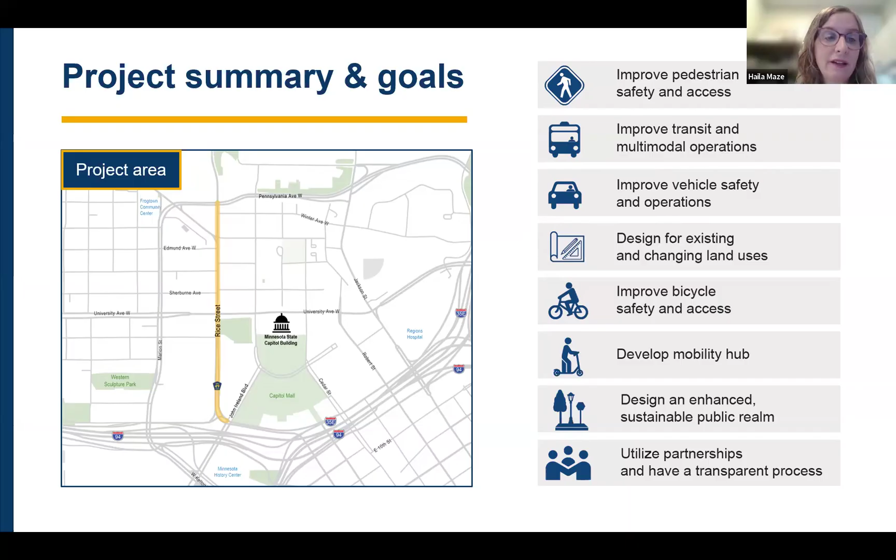This is a project timeline that walks through the steps of where we stand, from when this project was first initiated last year through when you'll actually see construction out there.

Last fall and winter, some of you may have been involved in our engagement, because we talked to the community about what's important, the priorities, and the goals you saw on the prior slide were informed by that. We're here now in spring 2025 to talk about potential designs, some options for what this corridor can look like.

You'll see us again later this fall, when we'll be narrowing things down further to get a more recommended design and start thinking in more detail about how this will look and feel and how people will use the space.

By late 2026, we'll have worked through the design to the extent that by spring 2027, we anticipate starting construction. I believe the intent is to start and complete construction within one season, not multiple seasons, but there's certainly other construction in the area we can talk about as well.

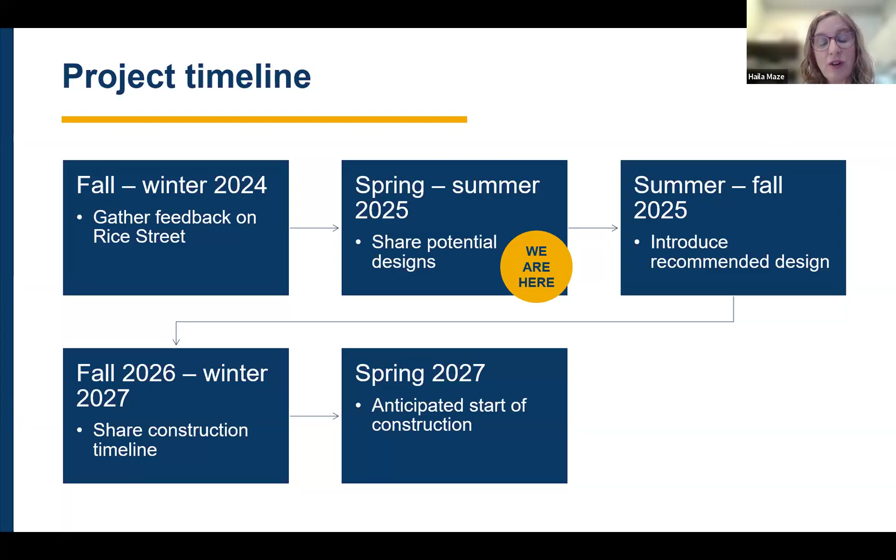We are coordinating with a number of other projects around this area, looking at the different opportunities to make sure that when all these things are happening, they're adding up and providing something more than the sum of its parts. We want it to feel well coordinated from the public's perspective, with things working in the same direction rather than flying in from different angles.

I won't claim that we're experts on all these projects, but we are talking to the people involved in them pretty regularly. I'll talk very briefly about what each of these means. We can answer general questions, but we're not the subject matter experts—there are other project people involved.

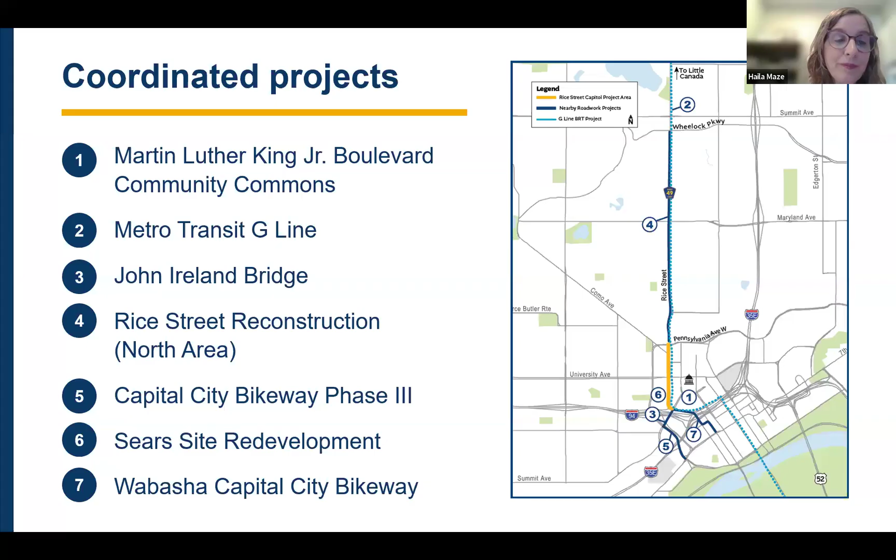We literally talked to the Sears site staff earlier today, and we will be talking to them regularly. There certainly is a lot of questions about the timeline of that, but we want to make sure it's aligned with the project goals and that we have a good understanding of how they work well together. And the Wabasha Capital City Bikeway, part of the bikeway network being built out downtown, will be connected with this as well.

Mentioned earlier the construction timeline. You can see we will be impacting your corridor for the next few years, starting this year all the way through 2027, with this segment being 2027. This staging is being done very intentionally. The goal—we cannot speak to the specifics of that today, it's too early, except for the portion already under construction. But we will be mindful that this is a significant impact to the community, and the detour routes and planning around that will be done thoughtfully. It's another reason to sign up for updates, so that updates continue past construction and design phases.

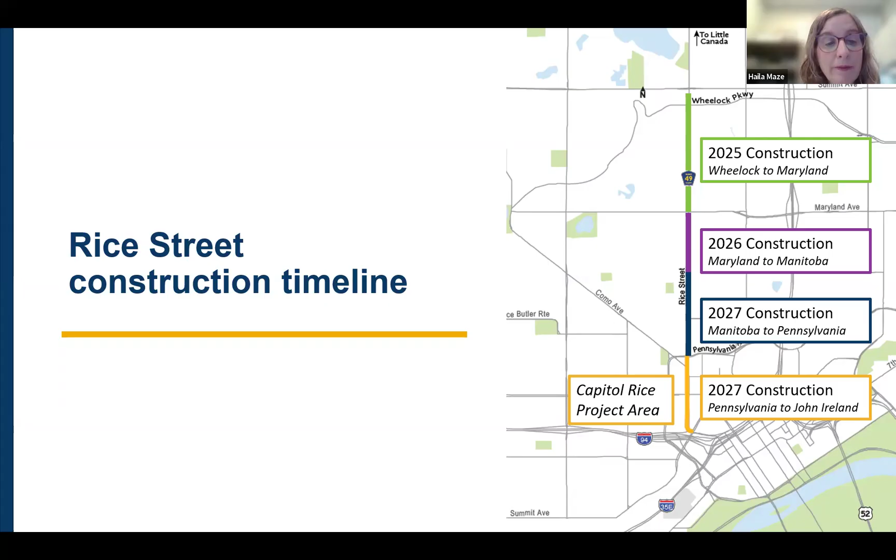Turning it back over to Nicole to talk about prior engagement. Engagement is a really fundamental part of our process here as we're connecting with the community, because your feedback is going to help shape this beautiful project that we're building, and we really want it to be community informed.

In our prior phase of engagement, we wanted to get out with the public to discuss existing conditions data—a technical way of saying what is working out there today and what isn't. We did a number of different outreach methods to connect with the community, updating our project website, connecting with community stakeholder groups and newsletters. We also did a mailing and several door hangers to businesses and residences along Rice Street, plus email and text updates and social media posts.

The cornerstone of that engagement was our open house on November 19th, 2024. We had a good conversation with the community at this event and heard a lot of great feedback. Some key themes revolved around traffic and transportation improvement—a general desire to make crossing safer, make speeds slower, and address specific issues like the Pennsylvania and Como left turn desire, and the intersection of 12th, John Ireland, and Rondo being a bit cumbersome.

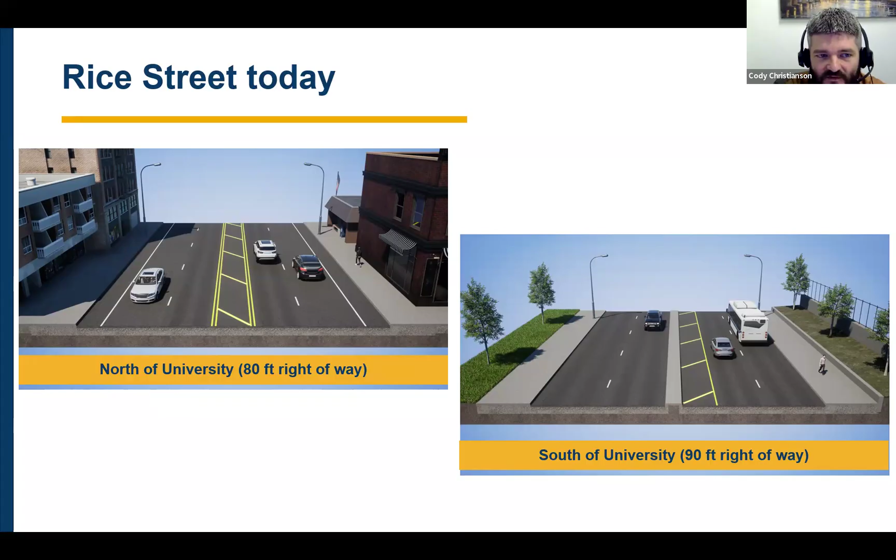The large piece carried forward in all of the concepts is putting in Rice Street as a 3-lane roadway. North of University, this would be a 4 to 3-lane conversion. Instead of having two lanes of traffic going in each direction, they'd have 1 lane in each direction with a 2-way left turn lane, or a distinctly one direction or the other left turn lane.

Some benefits to that include crash reductions, especially reducing rear end or left turn crashes. It provides fewer lanes that bicycles and pedestrians have to cross, especially at unsignalized intersections. That leaves more space in the right of way for bicycle facilities, street parking, bus stops, curb extensions, or other uses including greening space. It also simplifies some left turns, especially from side streets, with dedicated left turn lanes to get onto those side streets.

It also provides smoother traffic flow as you eliminate the weaving that you get as cars are turning left or right, and the cars behind them weave around them, which leads to a lot of those rear end crashes.

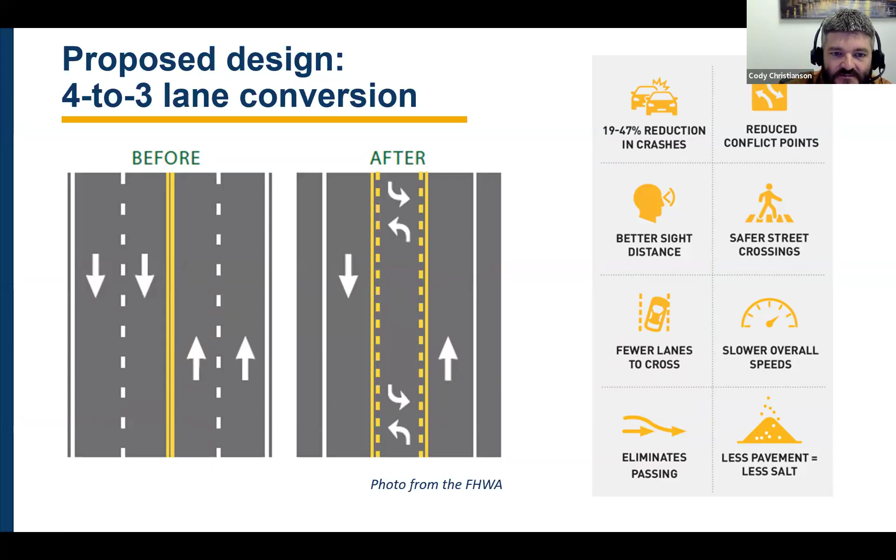So that was the roadway section for bicycles and pedestrians. A couple different options we're looking at: one would be a shared use area behind the curb, outside of the roadway, shared by both bicyclists and pedestrians. The benefit is it takes up less space having that one combined facility.

That leaves more space for other amenities, such as more greening or tree space. The challenges are that as you increase the number of pedestrians and/or bicyclists, it can create issues with folks knowing where they should be on the path when others are passing. It also gives some issues for people with low vision or blind disabilities on how they navigate that space.

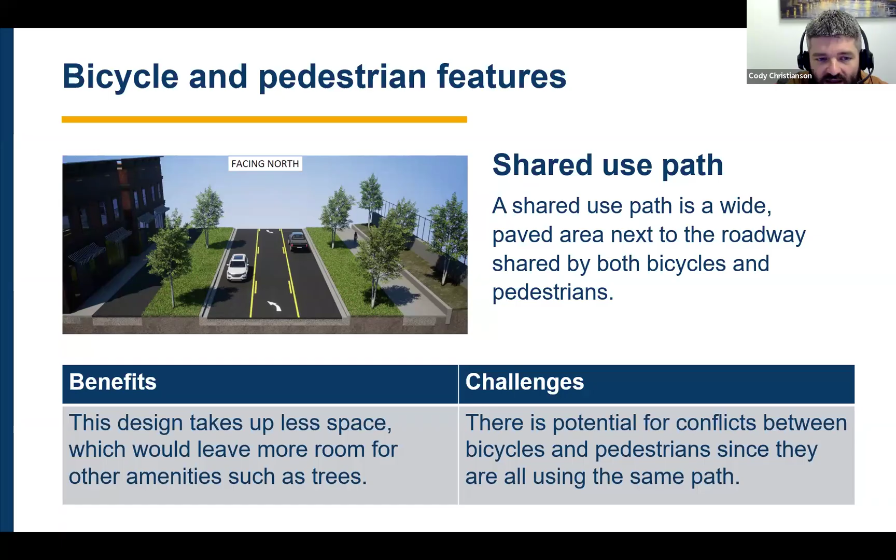The other option would be a 2-way cycle track or 2-way bikeway. This is a bicycle facility that is both separated from the roadway behind the curb, but also separated from the sidewalk through a number of amenities or other installations.

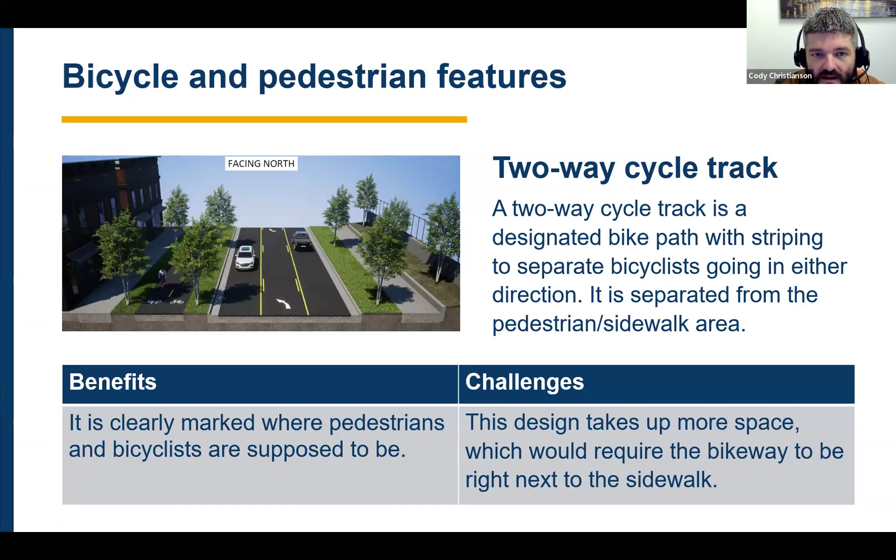The benefit is you have clearly dedicated spaces for both bicyclists and pedestrians. However, that does take up more space, so there are trade-offs on how that cross section of roadway, bikeway, and sidewalk end up, and what can fit into that space and what may have to fall out to get that separated facility.

That brings me to the actual design concepts for Rice Street. I'll add that online there is a virtual comment tool with the full 2-dimensional layout of these concepts, which gets into more detail on how all the different intersections, driveways, and properties look along the corridor. So this is the high level view.

Concept one takes that two-way bikeway or cycle track and runs it along the entire corridor from John Ireland up to Pennsylvania. Critically, this connects at the south end into the future St. Paul Capital City Bikeway that's coming up Wabasha, St. Peter, and over on 12th Street, connecting into this project at the 12th Street, John Ireland, Rice Street intersection.

So you can see here the 3-lane roadway. To the left, or to the west, would be that two-way cycle track, separate from the sidewalk area. And again, as right-of-way changes, this cross-section will change a little bit as you go along the corridor, but this is the general thought process there.

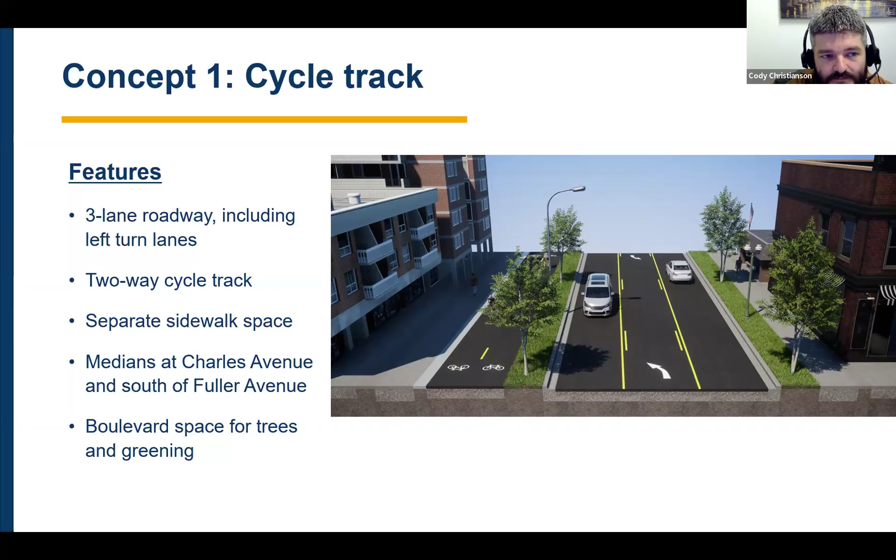So concept 2 then would be our shared use path. Here's a section north of University and how that comes together. Again, 3-lane roadway, some opportunities for parking along one side or the other. Same idea on the medians at Charles and south of Fuller. Again, some more opportunities for greening with that consolidated bicycle and pedestrian space on the west side.

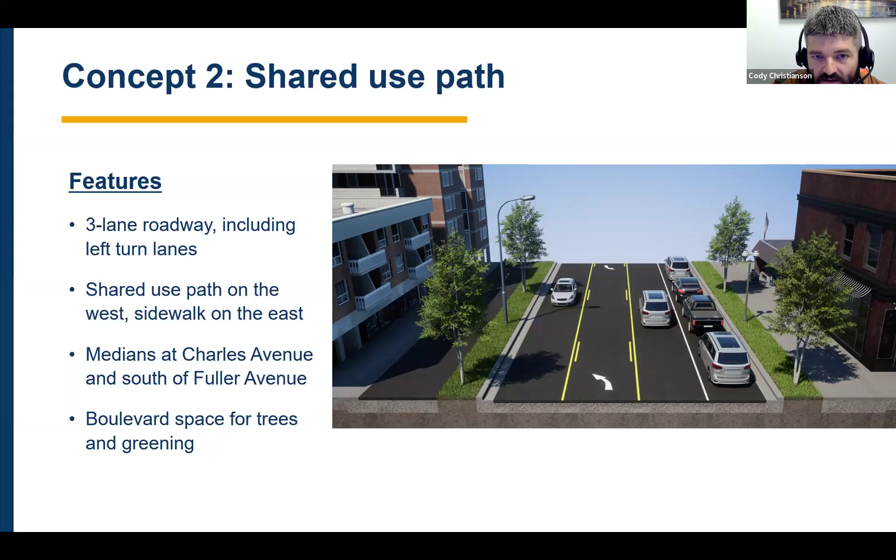It would also connect the shared use path north of University up to the shared use path that's being constructed on that separate Rice Street reconstruction project. So that's kind of how the two facilities would get blended together, with University Avenue again kind of being that transition point between the two.

The right-of-way south of University is a little wider, so you can get some of the same amenities with having the same separated cycle track, while we get a little more constrained north. So in this concept, we're able to give space for other things by consolidating the bikes and peds into the shared use path.

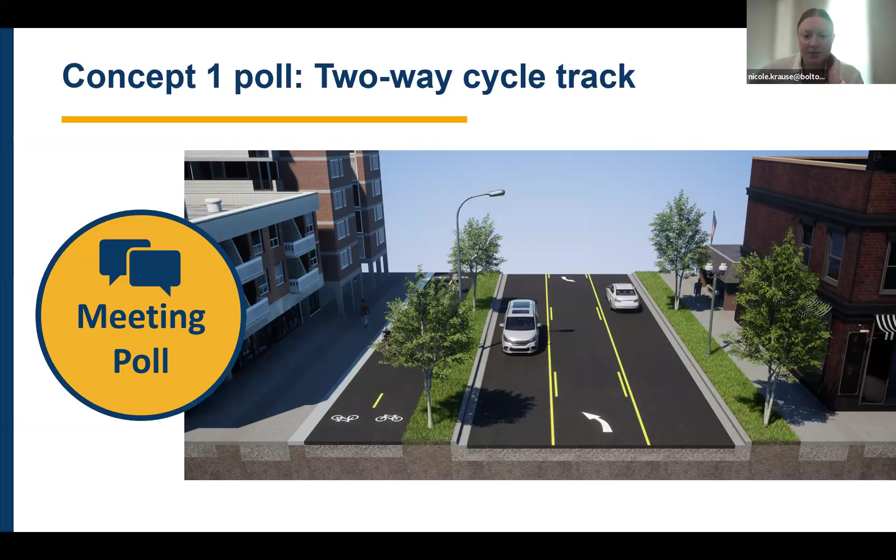Now we'll go to concept 2 and do a similar exercise. Let me pull up that poll for everyone. One moment. All right, same questions, but now you're considering concept 2. How well does concept 2 meet your needs in terms of driving safety and access, bicycle safety and access, pedestrian safety and access, and transit user safety and access? Once again, focusing on concept 2 for this one, which is the shared use path.

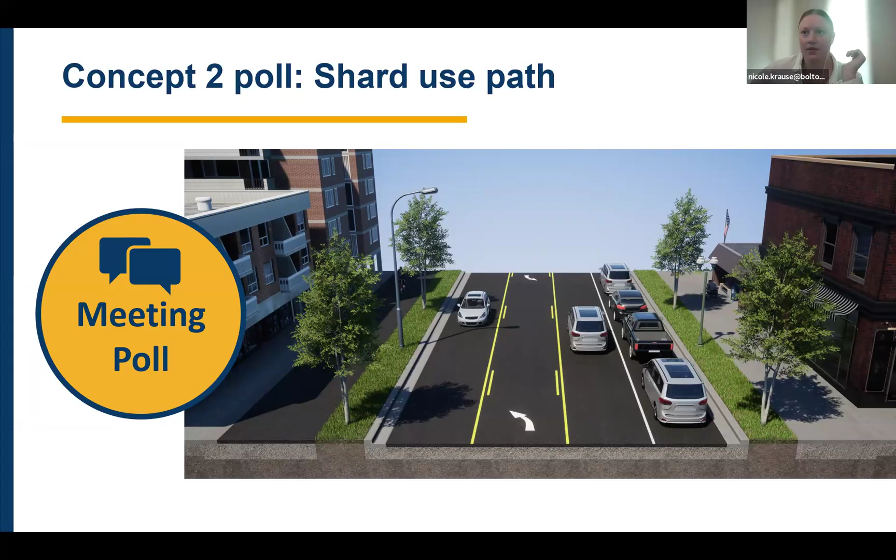And last poll here on the concept, we'll talk through concept 3, which is the hybrid option. That's a mixture of the 2-way cycle track on the south end and the shared use path on the north end.

So same questions here. How well does concept 3 meet your needs, looking in terms of driving, biking, pedestrian, and transit? This is the hybrid option that would include both the 2-way cycle track to the south and the shared use path to the north.

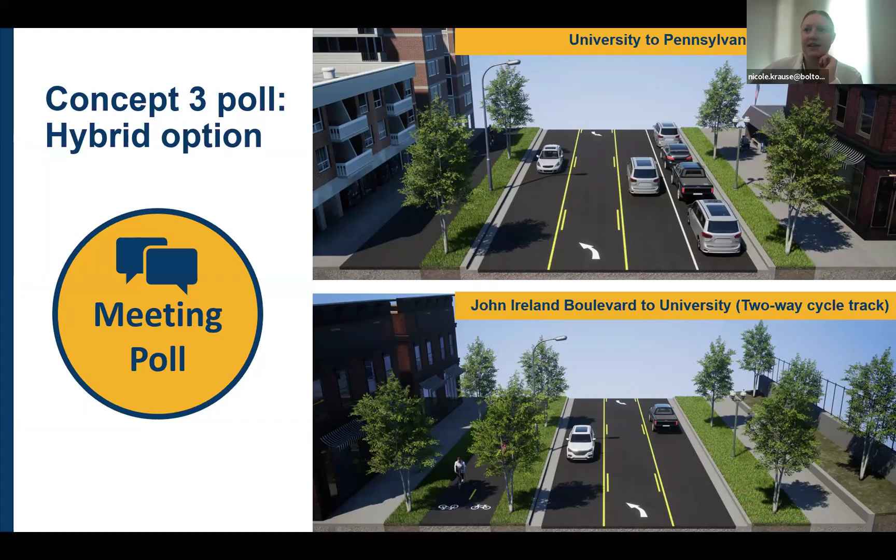All right, thank you so much for your feedback on those and for sharing a bit of your initial insights on the concepts. With that, I'll turn it over to Hyla to talk through some of the key areas along Rice Street.

Thanks, Nicole. As mentioned earlier, there are a lot of different considerations we're trying to balance here, and space along the corridor is a major one of these. One consideration when thinking about these different concepts is how much room we have in the public right of way, the land owned by the public sector, to do this work. To be clear, there's no intention here to buy buildings, widen this road, tear things down, or make this a wider footprint than it already is. There might be small adjustments here and there, but largely using the space that's out there right now is the primary goal.

This segment calls out that there are two different segments of this corridor, north and south, with a 10-foot difference in average width between them. That doesn't sound like a lot, but it does change how we have concepts out there. We have more room in the southern end for more generous planting areas, wider sidewalks, and separated facilities, whereas the northern end gets tighter, with more trade-offs and decisions about what actually can fit in that corridor. So you'll see different design concepts reflecting how much space we can use, with the intention that we're not making the road wider on the northern side.

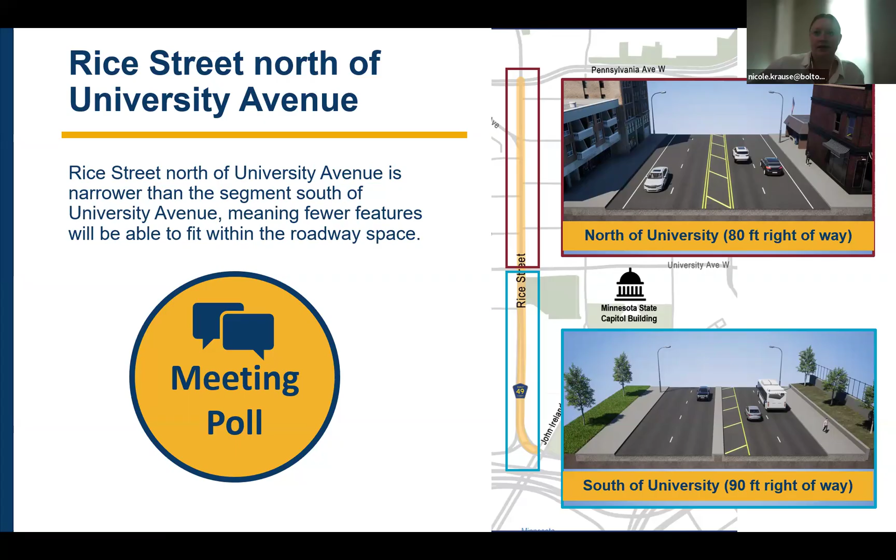As we were looking at this corridor, as anyone who's been there knows, this corridor has a lot of sub-areas that have a very unique character requiring special treatment. While we have the general cross section seen earlier, it's going to vary a lot based on location.

We will talk about both of those, but I'll start with the mobility. We have 3 locations along the corridor that have special focus areas where it's going to need additional analysis and treatment to make sure we have the right solutions, including looking at areas outside of the project footprint to make sure it makes sense.

With guidance from city plans and from the CAAPB plans, there is direction to make this a special mobility hub area, meaning enhanced treatments and design for a facility that meets multiple mobility needs for people traveling to and from this district.

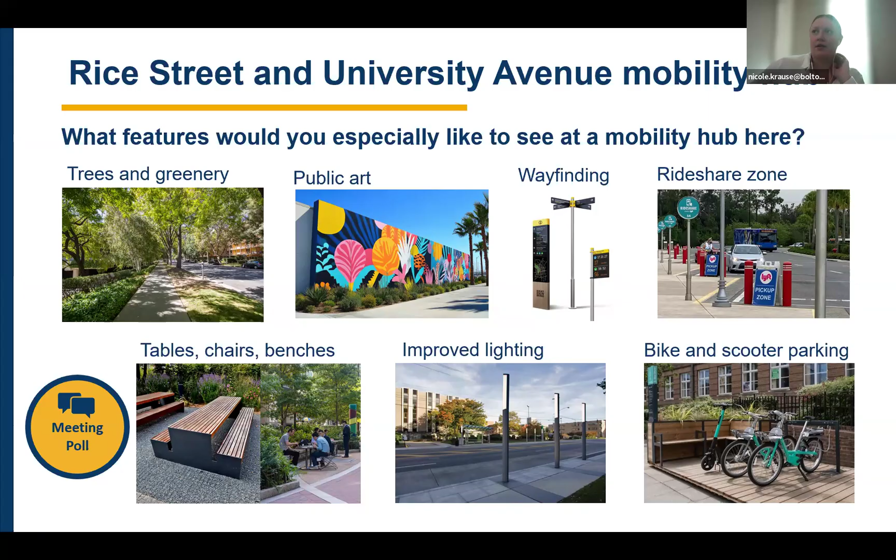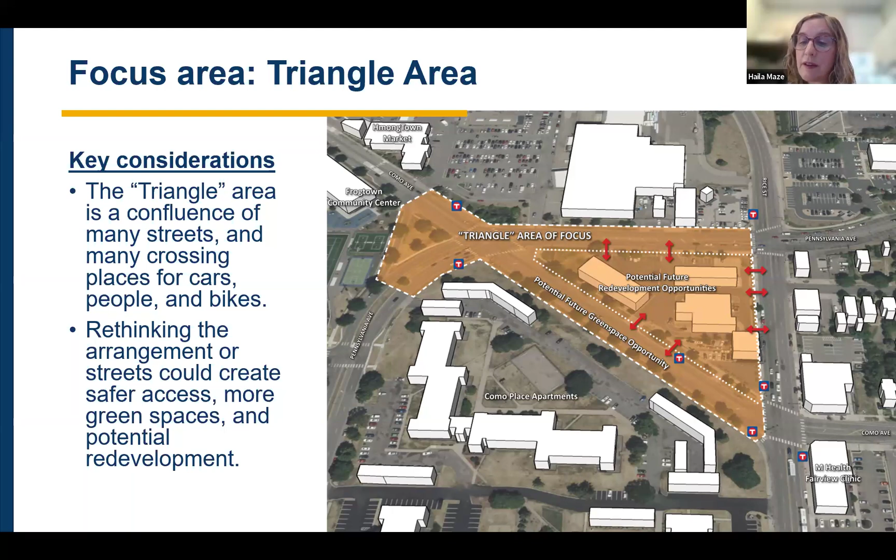I think I'm noticing there's some questions in the chat, but I think we will probably get to those at the end, right? For now.

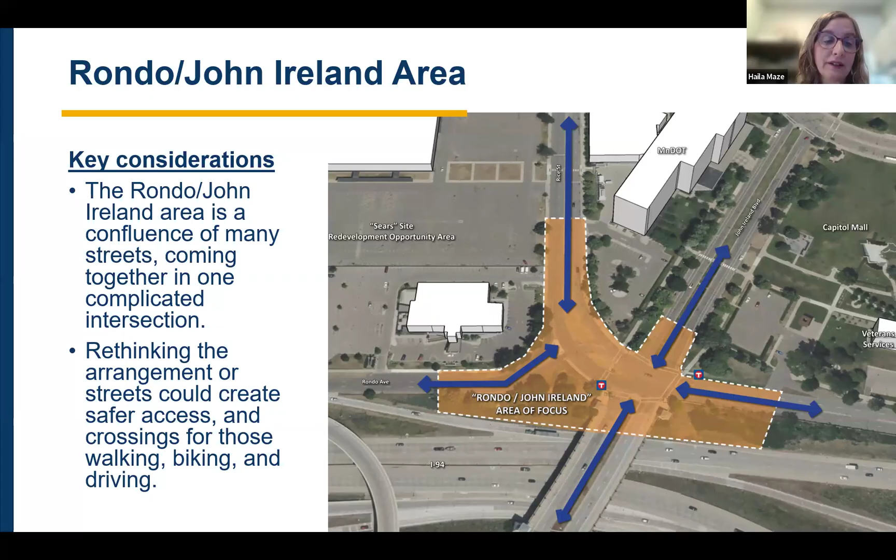Next slide. I think we're moving over into next steps, and Nicole, you're taking here. Yes, thanks for that, Haila. So to summarize our next steps, we've been talking about this a little bit throughout the meeting.

We do have an online survey available for folks to take to share their feedback on these design concepts. I will paste that in the chat now for everyone to access. That survey will be open until the end of June. Please do go take that survey so we can hear from you on what's working with these concepts or what isn't. Once again, that will be open through the 30th.

In addition, we also have our comment map, which lays out in detail each of the different design concepts. So it isn't just a photo of what it could look like, it's the actual engineering layout, and that was pasted in the chat earlier. Please do click there. You can select which concept you'd like to see. You can zoom—it kind of works like Google Maps, where you can zoom in, zoom out. You can also place comments. So that will be another great tool for you all to use to share your feedback on these concepts.